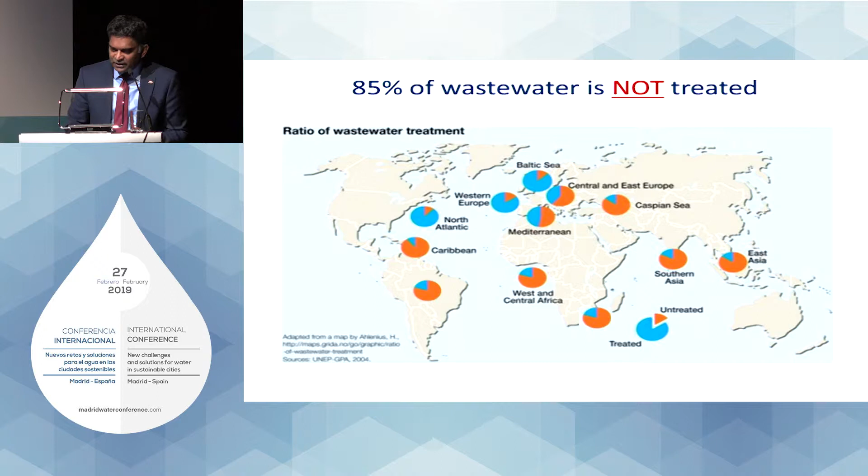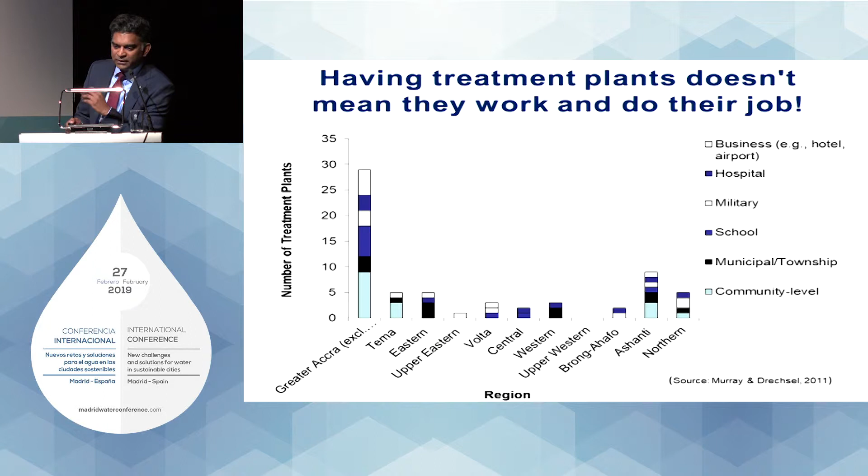We have put wastewater systems all over the world, and this is a diagram from some work we did in my last organization at IWMI. We have built lots of wastewater treatment systems but haven't engineered them particularly well. We haven't thought about some of the local challenges in terms of operation and maintenance. This diagram shows the number of wastewater treatment plants in Ghana, but these are actually the number that are working. So we built lots of wastewater treatment systems, but the majority of them become dysfunctional. They don't work. The challenge for us now is to rethink how we engineer these systems so they're appropriate and understand the local context in which they operate.

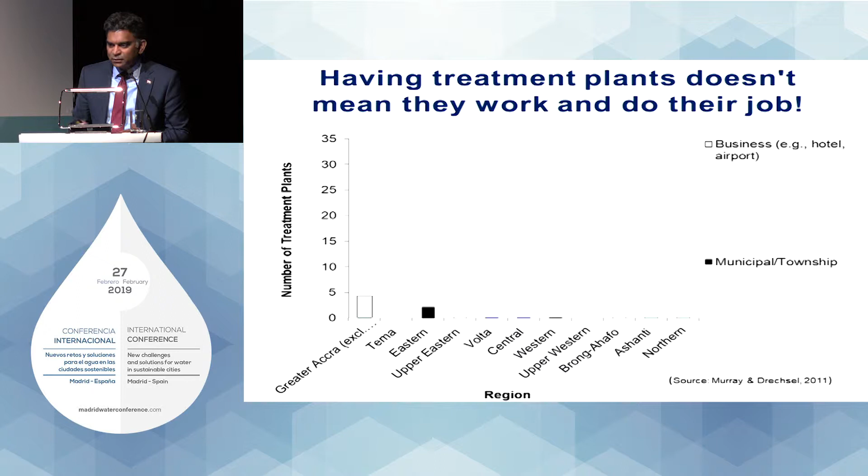For the developing world, the next 20 years will be a golden era in terms of wastewater. If you think about the last 40 to 50 years in the West, it's almost been like a pilot study. We started with fairly clunky, not so efficient wastewater treatment systems which we experimented with and tested, and now we're starting to evolve technologies that allow us to have much smaller footprint systems, systems which are more energy efficient, and systems which allow us to recover some of the resources from our waste streams.

A lot of the innovation has been around adjusting the physics of the process, changing the settling characteristics - for example, granular sludge - or changing the viscosity of our sludge, like with thermal hydrolysis. These types of changes allow us to intensify our treatment activity and get greater efficiencies at lower energy cost, doing more with less. With advanced control systems, sensors and automation, we're able to optimize the stoichiometry, pressure, and flows within these systems, giving us maximum efficiency. I think for the developing world to learn from the West and start deploying these more innovative approaches is really the way forward.

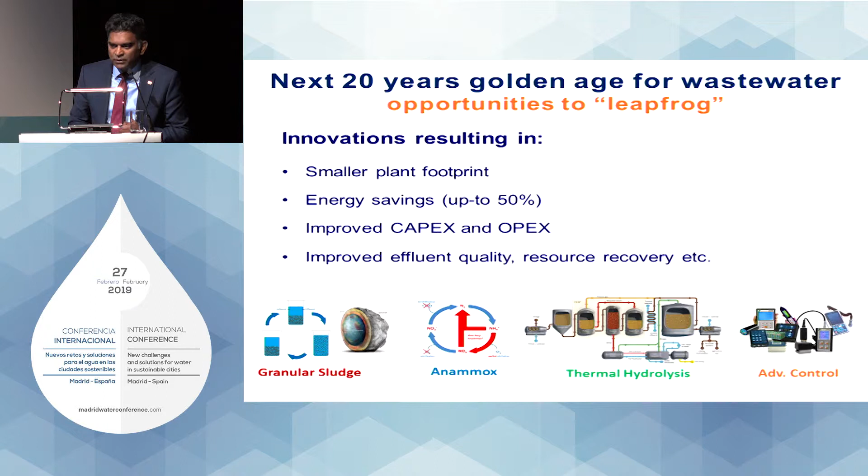When I think about the water sector, I see a big change in perspective, and the biggest change you see is in this idea of what it is we want the water to do for us - the productive use.

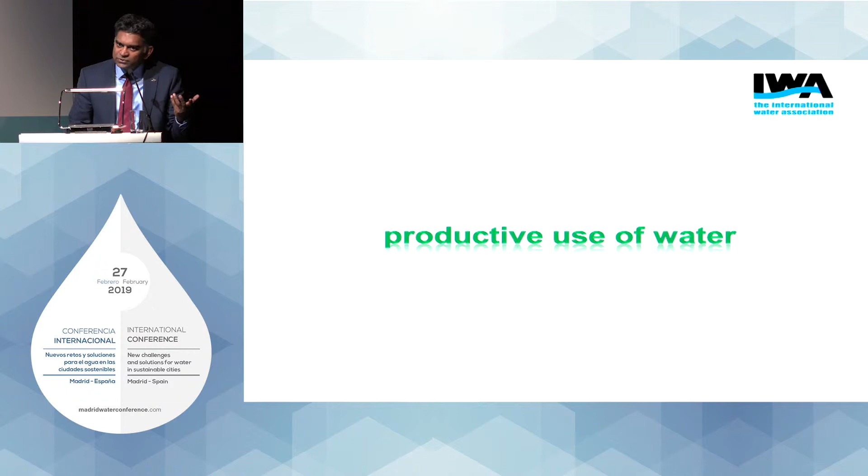So what is it we want the water to do for us, and how do we create a quality and quantity for that particular use? If we want to drink water, we need a certain quantity and quality. If I want to flush my toilet, the question is, do I need water? And if I do, what type of quality would be appropriate?

You see a big change in the water sector where we're starting to create different grades of water for different uses. On the left-hand side, you have the West Basin Initiative from California, Los Angeles, where they create what they call designer waters. They use innovative membrane technologies, taking wastewater from the city, and for different types of industries, they create different grades of water. So it's not one grade, but a designer suite of water.

On the right, you see wastewater being productively used to dilute saline water, seawater, which brings down the cost of desalination while at the same time treating the wastewater. So we're starting to recognize that all water is good water, but it's just water of different grades. And how can we use that water effectively?

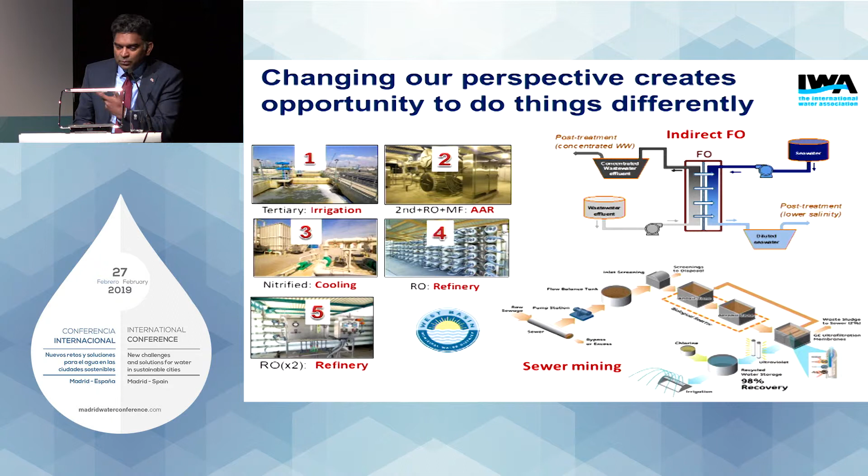Critical to this sort of productive use thinking is viewing the whole water cycle as one, and recognizing that all waters that flow within that water cycle are good water, and the trick is to manage your need for water with these different types of water.

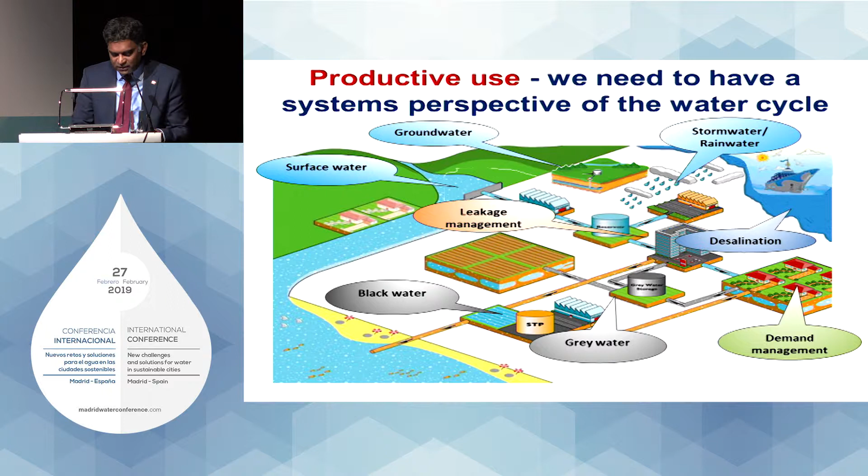So if I need more drinking water, should I extract more surface water and groundwater, or should I reduce my leakage, or do demand management? If I want to have water for gardening, can I use my grey water and black water? So this sort of systems view of the water cycle is how we're moving.

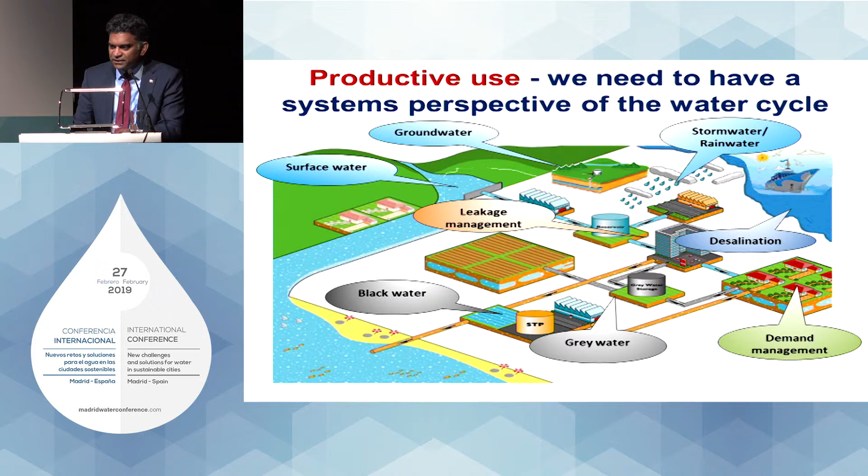But critical to this is really modeling, a systems approach to modeling. This is where you're modeling flows and contaminant fluxes so that you can match the different quantities of water for different uses, so you can do a sort of water balancing to reduce the overall water footprint. Some people in IWA are starting to model water as a packet moving through the water cycle.

That packet has a signature. That signature quantifies or captures the amount of energy that was expended in producing that water, the chemicals that were used in producing that water. And by having these digital ledgers and watching water move like packets, you can start to do this type of water balancing.

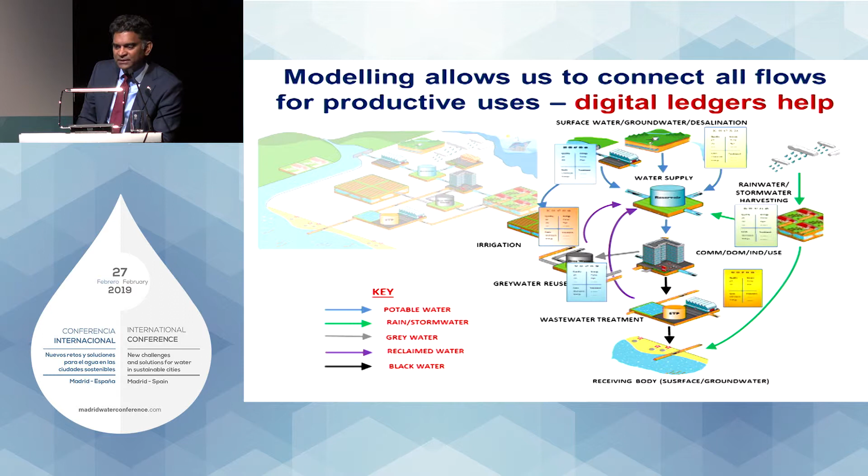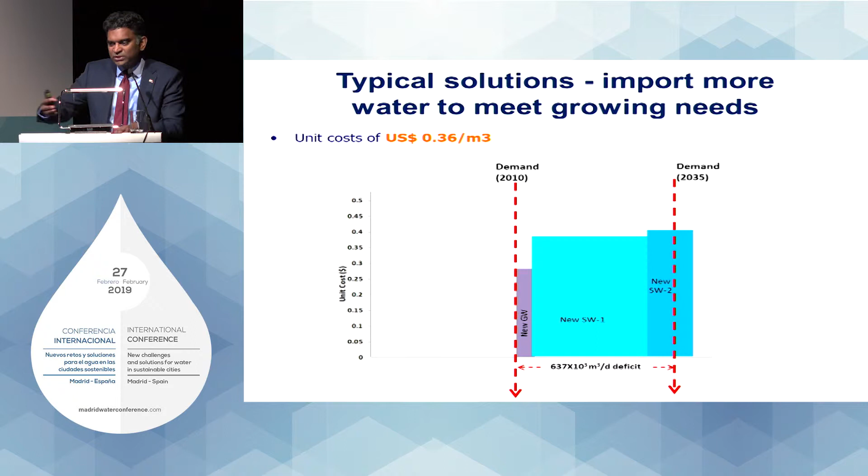This is some work we did a long time ago in Africa, in Nairobi, where the response of the government was really to meet the growing demand just by extracting more surface water and groundwater. So they wanted to build more infrastructure to meet the growing demand.

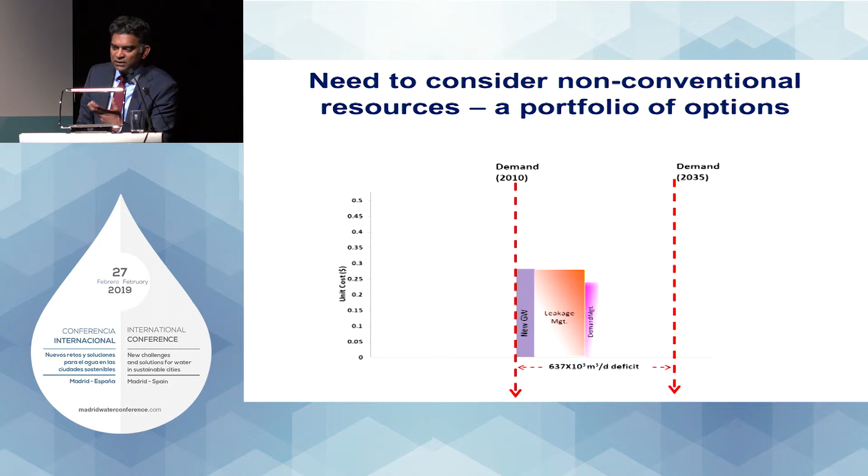But when we start applying these sort of systems-based models, we start seeing that actually there's quite a lot of water embedded in the system that can meet that growing demand, so you don't really need to invest in new infrastructure. You can start playing with options where you do more exotic types of treatment, and sometimes it might be more expensive, but in many cases it could be cheaper. We've published a book on this.

This idea of modeling water as packets as they move through the system is also quite useful in the way in which we manage, for example, leakage. Because we tend to think of water, once it's in the distribution system, as being of an equal cost, an average cost. But actually, different parts of the system, the water is costing a different amount—the energy used to produce that water, the chemicals used to produce that water if it's coming from different sources.

So by using these types of digital ledgers, we can start to target where we put our investments into things like pipe rehabilitation, leakage reduction, where we get the biggest bang for our buck, because we start to recognize that not all the water is of equal cost. Some water has cost us more to produce. And also this idea of having these digital ledgers allows us to also support decentralized systems.

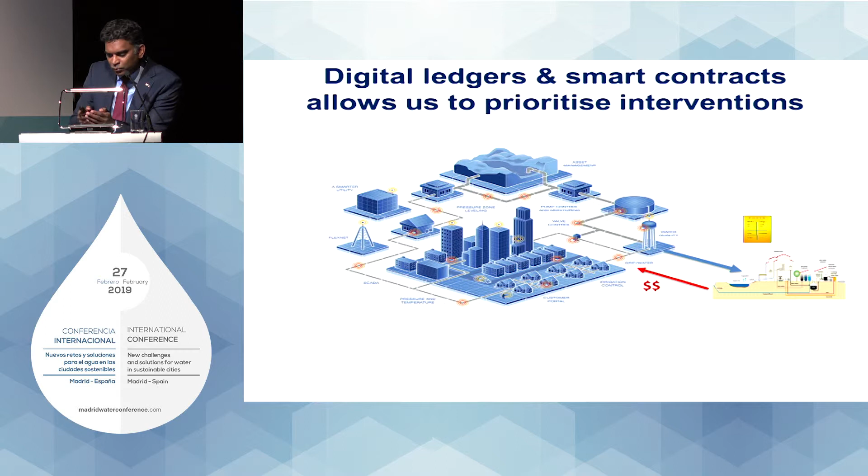You're finding many systems that are coming off the grid, and they have some localized storage, and they're able to negotiate with the main supplier at what time they want to withdraw water, because the water costs a different amount at different times of the day because of the energy, etc. So they can start to negotiate and engage in smart contracts, using things like blockchain in order to buy water when they need it.

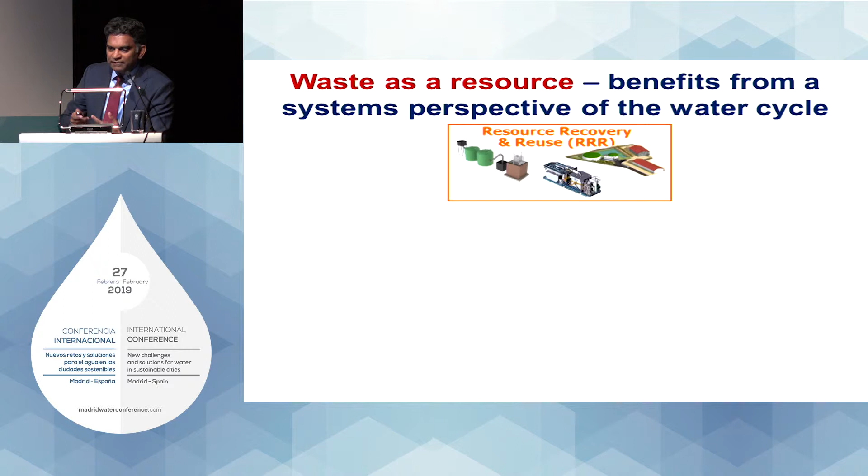The other major shift you see in the water sector is the way in which we view wastes, and I think all of you know about this. But again, having a systems perspective of your water cycle allows you to look at where in the water cycle you want to try and capture some of these resources.

For example, energy can be captured in the drinking water cycle, where you have areas of high pressure. The energy is quite limited, but you can capture some of it. In your collection systems, you can get heat using heat exchangers, but also if elevation works in your favor, you can generate some hydro energy using turbines. And then at your wastewater treatment works, the classical biogas, biofuels, or microbial fuel cells. So there are lots of places where there's potential to capture energy and move towards energy neutrality or even net positive energy.

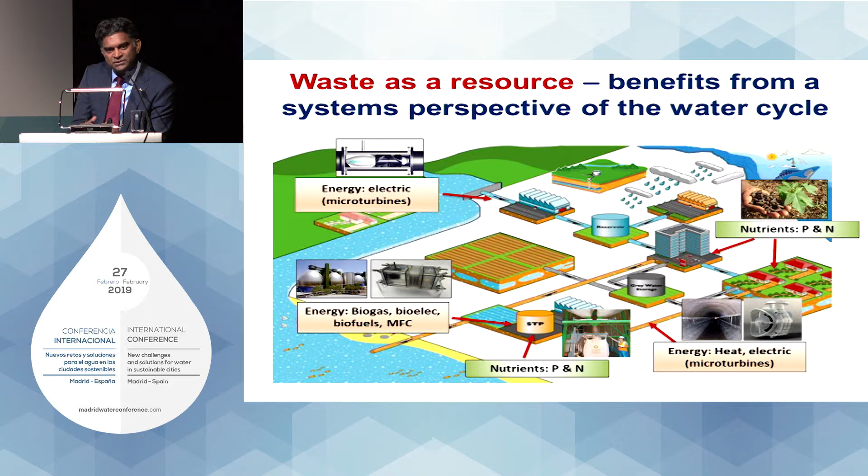Similarly with nutrient recovery, you can recover nutrients from a decentralized fecal sludge management approach where you have septic tanks, but equally you can capture nutrients from a centralized wastewater treatment works, precipitating out the phosphorus. But the big problem for me in this space of resource recovery and reuse is not the technology.

I think the technology is evolving and it's creating lots of opportunities, but it's the fact that engineers fail to understand the business models that will sustain this type of resource recovery operation. Very often it's engineers telling you that we can generate so many tons of fertilizer, we can generate so much quantity of energy, but they don't understand who will be the customers for these products.

So if it's fertilizers, is it farmers, is it a fertilizing company? And then they don't really appreciate what the value proposition is of their fertilizer. Is their fertilizer cheaper? Is it more effective? Is it greener? Why would somebody choose to buy their fertilizer over somebody else's? And then the cost to move that value proposition to the customer is not fully understood.

And so what we find is that these systems fail because we fail to understand the business models that are going to make them financially viable.

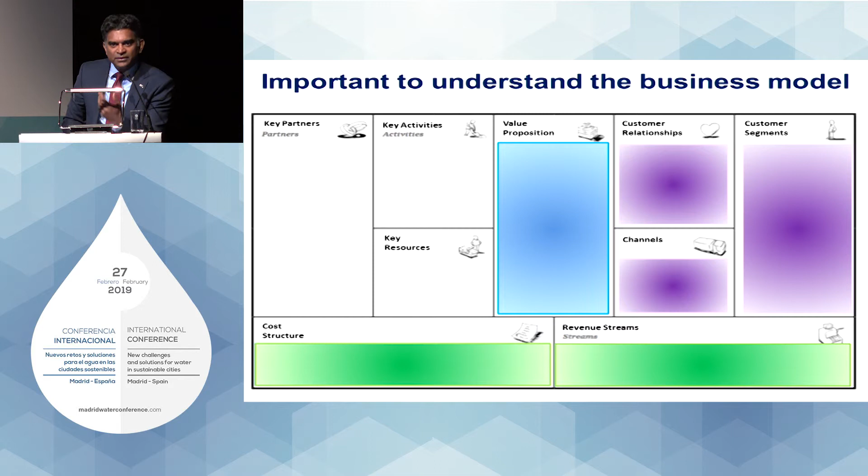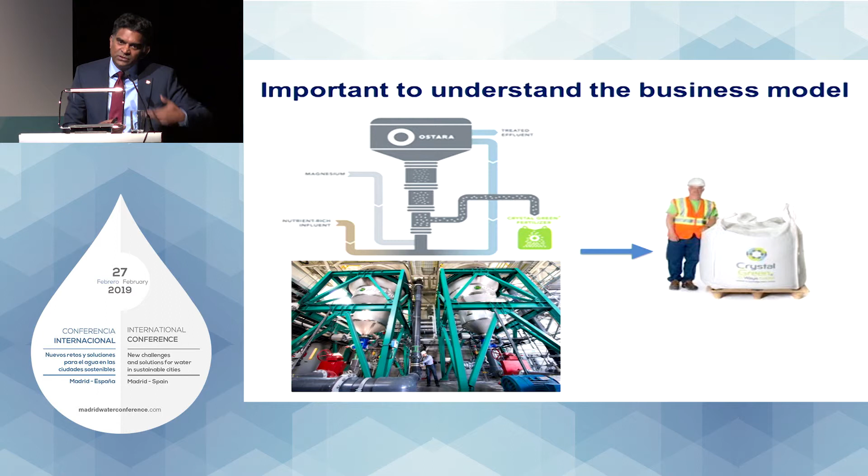Most people, when they analyze this, think that the money is coming from the sale of the fertilizers. But actually very little of that money is coming from the sale of fertilizers. Most of it is coming from the fact that they are managing the nutrient issues of that wastewater utility, and at the same time reducing maintenance costs for that utility because they are reducing pipe blockages within their return activated sludge lines. So those are the two major income streams that make this thing sustainable.

Financially viable, and of course they make some money from the sale of the fertilizers, but it's very context specific, and I think we need to start thinking about these things a bit more.

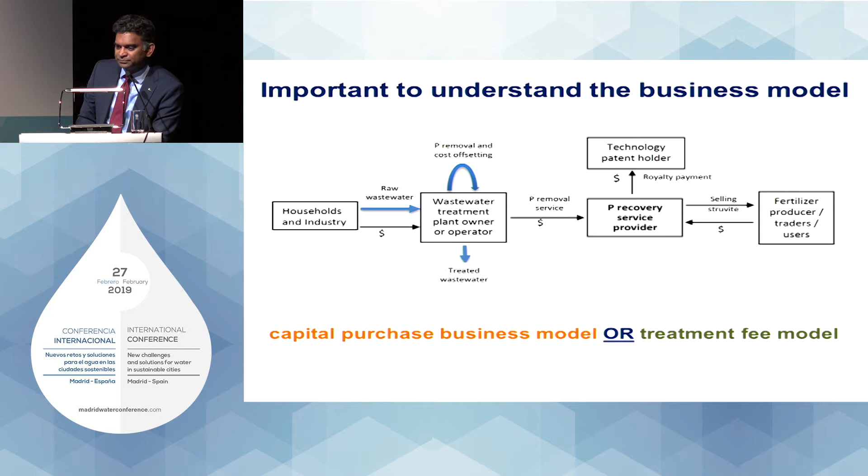The last thing I wanted to touch upon is really the challenge around innovation. The water sector is viewed generally as being quite conservative, and it's for rational reasons. We are very risk averse in relation to public health. We have very tight budgets, and so we spend money very carefully, and the upfront cost associated with innovation makes it sometimes very difficult to procure.

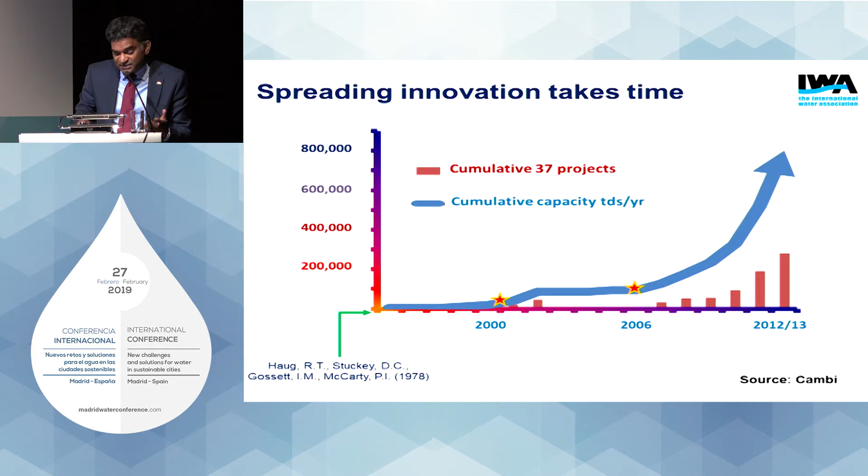I think one of the problems that we face is we think of our sector as being homogeneous.

We think that everything within the water sector are elephants. Elephants have very long gestation periods, they carry their child for a long time, so the R&D process for elephants is very long. And then they have very long lifespans. We tend to think of the water sector because we have this large concrete infrastructure that everything is an elephant, and so we think that nothing changes.

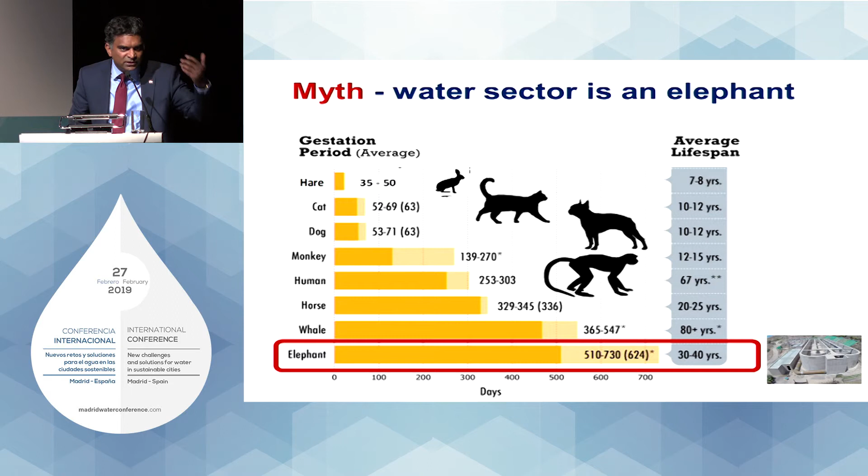But actually the water sector also has horses, and these are the mixing devices, the pumps, which have slightly shorter gestation periods and much shorter lifespans. These devices are what improve the physics of your processes, the settling characteristics, the viscosity. These can be used to optimize your elephants much more effectively.

And then, of course, you have hares, your sensors, your controllers, which have very short gestation periods. They mutate, so they change very rapidly, and so their lifespans are very short. I think we need to recognize that the water sector is not just elephants, but there are these different components, and each of these components has their own independent innovation cycle. But unfortunately, we tend to manage everything in one way, as elephants.

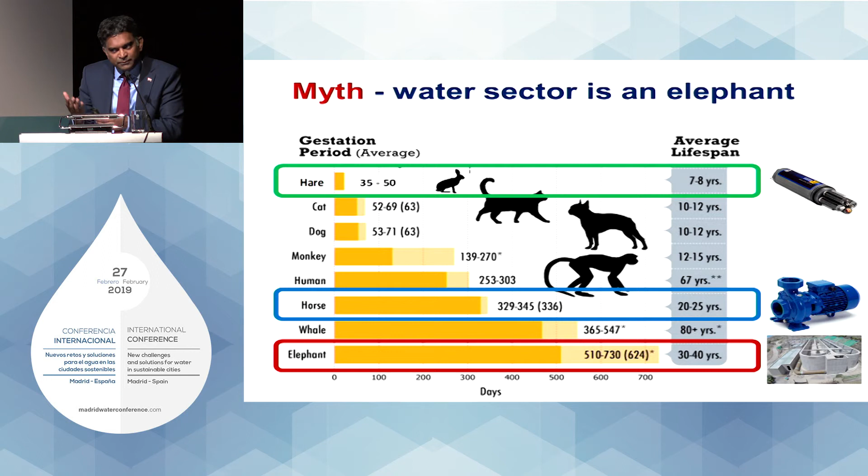So we procure our horses and our hares as if they were elephants. And it benefits those people that sell those technologies to the water sector.

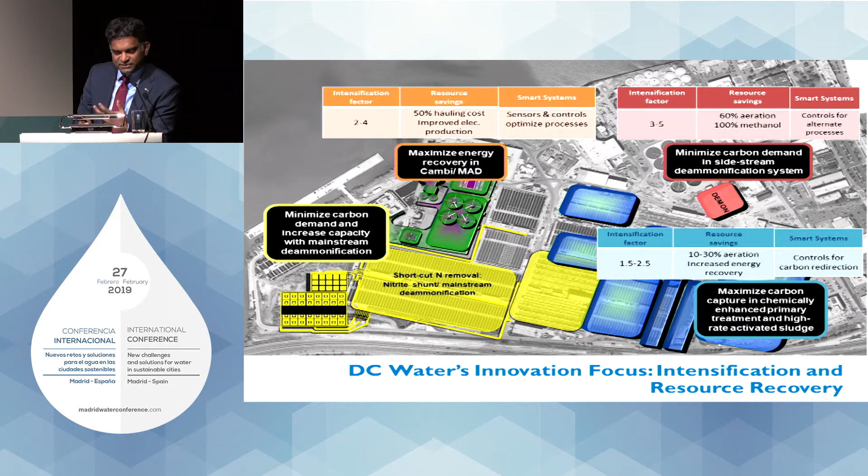They could intensify their processes, and with the hares, they could control the chemistry within those reactors, the flows, and they could also have alarms which trigger when there are digester upsets to minimize that. So you see the opportunity here to deploy your hares and horses in a way that you can really repurpose your elephants. And this is something that we as a sector have to start thinking along those lines.

And I think when you think about the water sector, we tend to verticalize our technologies, right? So the hares, the horses, and the elephants are viewed as one continuum. And I think the challenge for us moving forward is to try and unbundle these different aspects of our water sector.

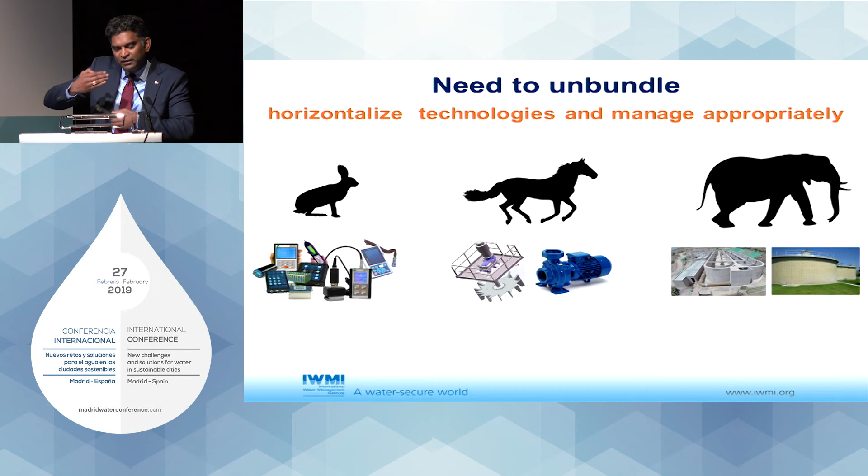So the people that we employ to manage the hares are people who really understand sensors, understand these devices. They go outside the water sector to procure some of these devices from other sectors that are innovating in this space. Similarly with the horses, the mechanical devices that they buy, they can purchase them from other sectors. But they understand that these devices will only last a certain period, and they are always preparing for the next turnaround in terms of that innovation.

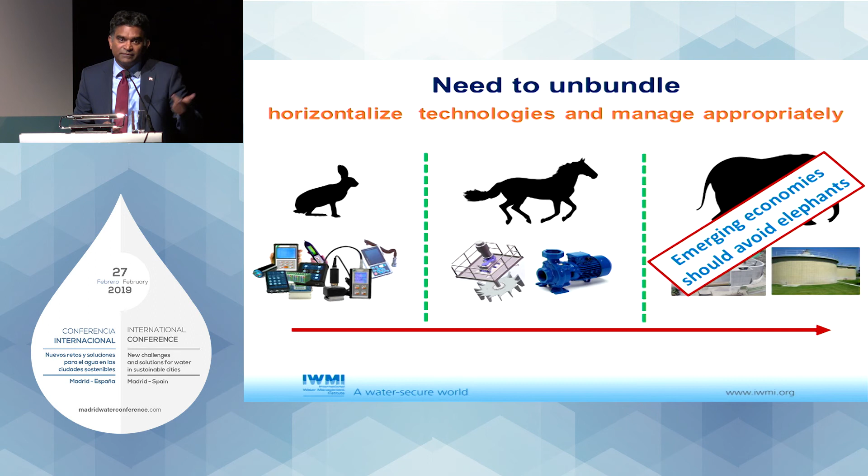And it allows us to really then repurpose the elephants that we have. The one thing that I would say is that with these emerging economies around the world who are implementing wastewater treatment systems, I think we should encourage them to avoid investing in elephants. I think they should move away from these very large, fixed concrete infrastructure that lasts for 50 years, and think much more around smaller footprint package type plants that also have shorter gestation periods and much faster innovation cycles. And I think that's the way forward.

So to conclude, I will say that the water sector is currently facing quite a lot of challenges. And I don't think that we are in a position to stay in the business-as-usual lane, because with global change pressures and the demand, the supply-demand deficits that we're going to be facing in the future, the way we currently run our systems is not going to enable us to manage our water effectively.

What we're currently doing is we're in the middle lane. We're trying harder, okay? We're trying to optimize our systems as much as we can. But I think really what we need to do is to transition much more to a circular economy approach where we try to use water as many times as possible. We try to create different grades of water for different uses, and we try to capture as many of the resources from those waste streams as we can.

And we think about all of these things from the design stage itself. So where we locate the plant, the types of technology we use, is really to facilitate that. It's not something that we retrofit. So that concludes my presentation to you. Thank you very much.